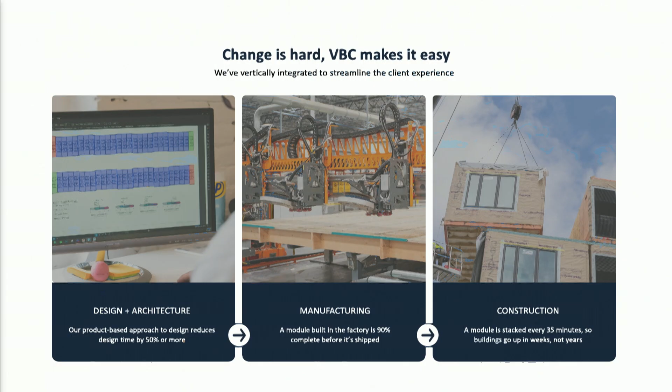I will move on. So what does VBC do? I think it's important to explain all of the things that come under our umbrella so that you can understand exactly why we've made the decisions we've made. So we're fully vertically integrated. We have the design and architecture practice and integrated engineering, which I run. We have 3 different manufacturing facilities, which we'll go to next. And then we have what we call our sandbox construction company. So they manage all of our sets and transportation on all the projects that we do globally, actually. And they do perform general contracting services within our home market of Philadelphia.

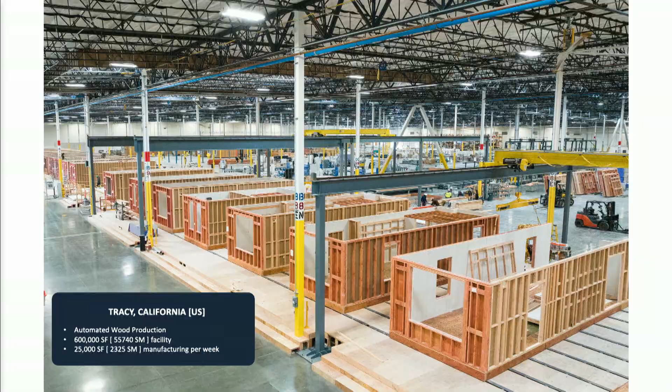This is our California facility. It was formerly a Katerra facility, and we've rebuilt everything inside of it to support our wood building system. It's large. We wouldn't have bought such a big facility, but we inherited it, so we rebuilt it, and it's now running. It's in operation daily. And we are now on to our 5th project going through that facility, which is great.

Highly automated, very different than the next facility I'm going to show you. Only builds wood, currently. TBD on that one, but currently it has only ever produced wood.

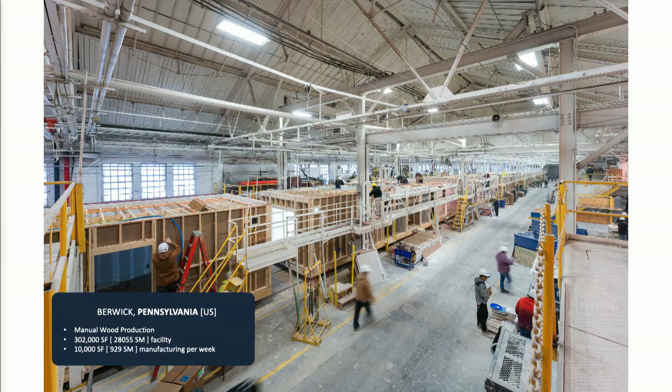And then the 3rd facility, we have a steel facility in Chojnice and Gdynia, Poland, that not only manufactures steel modules, but we also have an automated furniture production facility next door. Why am I showing you all of these? It is really difficult to manage the product strategy on wood and steel at this scale globally.

It is very difficult, and without having really a platform-based strategy, there would be no way that we could be successful at doing this. And so a lot of this came through the thought processes involved in design thinking. How can we find inherent things that are similar in all of the markets that we work with? How can we optimize those, and how can we have really an amazing set of industrial designers, manufacturing engineers, architects who can speak the same language and don't get annoyed by being in the same room with each other?

And then also be able to collaborate with contractors, electricians, plumbers, unions, in an ecosystem that doesn't necessarily always play nice in the sandbox. So that's what we're trying to solve at VBC. We hope that the future of industrialized construction doesn't require a company to kind of gobble up everything in order to be successful. I say it to the design team all the time that I really am creating a whole bunch of product designers. I'm not necessarily trying to create the best architect. I'm trying to create a thought process, really a way of approaching a problem in a way that is manufacturable and buildable.

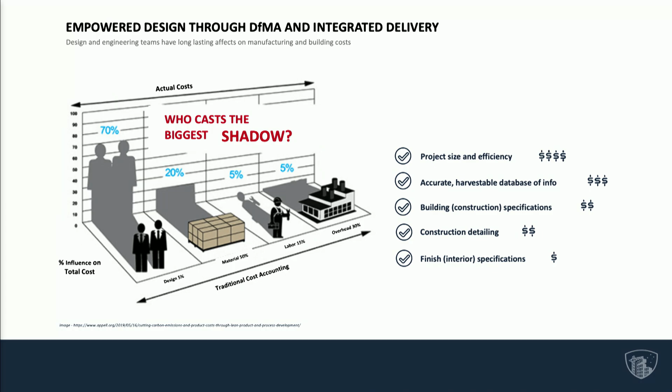So the thought process in developing this design team or this design ethos is really, you can affect not only project size, build less, build more efficiently, affect sustainable construction, you can affect building specifications, you can affect construction detailing, you can affect manufacturing throughput, you can affect all of the things that are maybe less often aligned with the design process.

And then you have to pick which lane you're gonna be in. Do you wanna standardize or do you wanna be flexible? And this is another age-old struggle. And I think that there's business models that work that land on one side or the other side or in the middle. And I think you just have to really understand what markets you're solving for and what your business model really is in order to understand what the solution is for you.

For us, we didn't choose standardization or flexibility. What we did was understand what amount of variability we wanted to allocate for. And part of that reason is because we don't just operate in one region. A lot of the successful volumetric modular companies or panelized companies really do so by kind of owning one region, right? Like know the model that you're building, know where you're going, and optimize the heck out of it. I think that is a way to be successful.

With the kind of natural growth and opportunistic growth that VBC has done, we have had to operate in a lot of different markets that don't necessarily have the same regulation. So we've had to find threads through that in order to be successful. So for us, it was about understanding what the market wanted, specifically the US market, which has a very specific desire to have things not look the same. And me as a still practicing architect, I also have that desire. But I also know that for me, problem solving is the biggest thing.

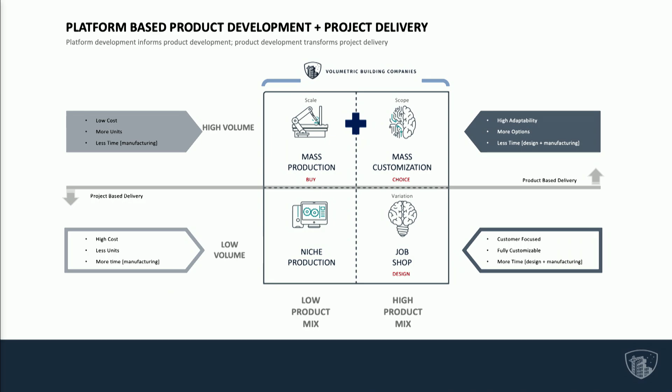Housing is not fashion, right? It's a completely different ecosystem, but what can we learn from the retail industry? I actually really like the idea and thought process of Gap Inc. and how it's evolved. So they have a brand that a client can grow with, right? It's not only aspirational, but they cater to their audience where they're at in their life. And that's a really interesting thing to think about if you're talking about crafting housing that people want.

And they have strong internal processes and things that tie through Old Navy, Gap, Banana Republic, and Athleta, that they can aggregate certain things centrally to gain cost benefit for all brands. And then they also adapt or die, right? They've seen tastes change in the fashion industry, and they allow for change but still maintain brand recognition. So it's one of the things that we studied in development of the platform.

Housing is also not a car. I wish it was. I really wish it was, and in certain markets it is, but it isn't if you're trying to think about things at scale, at least in the US. But what can we learn? Standards are critical. You have to know what you're building with, and you have to have a voracious knowledge of what you're building with. You have to understand exactly how it works at every level. And you need to manage iteration.

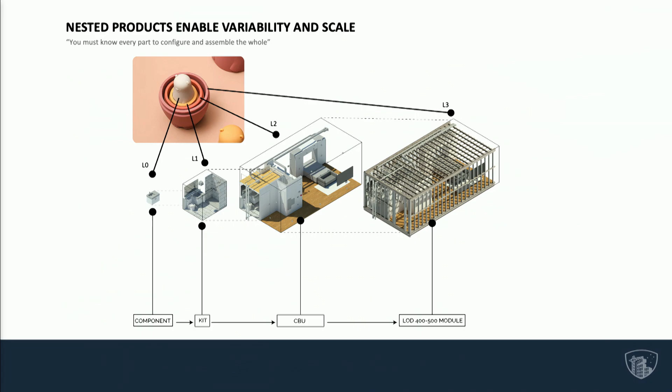Level 3 is something that I'm really super stoked about, and it's really taking that nested philosophy to another level, and saying, okay, what would we do if we essentially take the last 5 feet of a building or the last 5 feet of a volumetric modular box and say that that's free to do whatever you want with, but everything on the inside, we prescribe. That allows us to then fully engineer everything in that module. And that's for us what level 3 is.

So that's something that we're rolling out very soon, which we're really excited about. And that's, I think, where we see some real change and some massive benefits to throughput in the facility. And then this is just practical views of what those levels of product look like, right?

So our base level product is standards. We need to know how we build for both our steel and wood systems. What are the typical connectors? The things that you need from an architect, typical details, right? But typical details that have work instructions that are associated to the factory, videos, things in Spanish and English that really are not just about design, but go all the way through manufacturing.

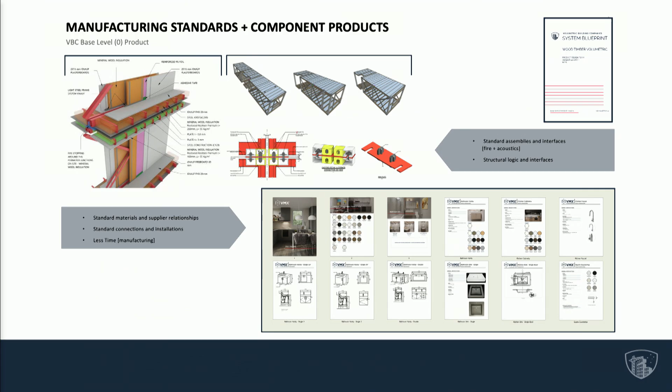We also have standard pieces and products and components that I mentioned, which you see on the screen. And then have a description of that blueprint so that other people understand what the design framework is for that system. And then what does level 1 look like? Level 1 are these kits that I was talking to you about. So pieces and components that can be toggled between and bill of materials that are very specific to those elements that speed manufacturing.

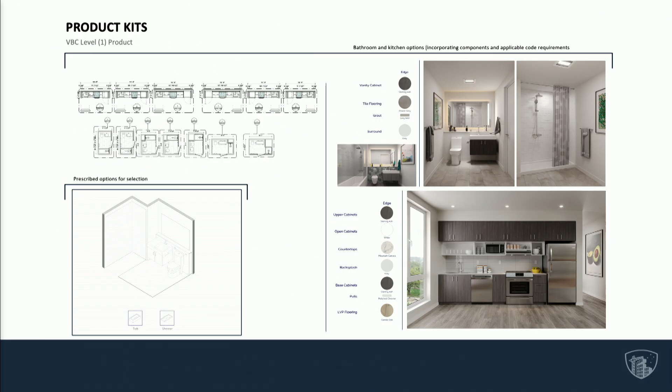Level 2, these CBUs that I was talking to you about. So fully designed, optioned, and rendered. Pieces that can be rapidly deployed in configurators for either us to use internally or external customers to use. We have not rolled out that external function yet.

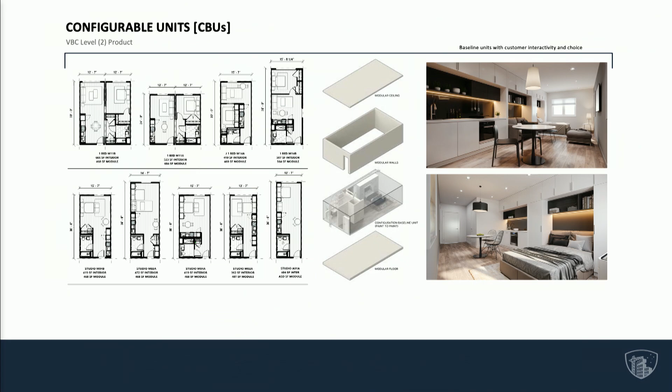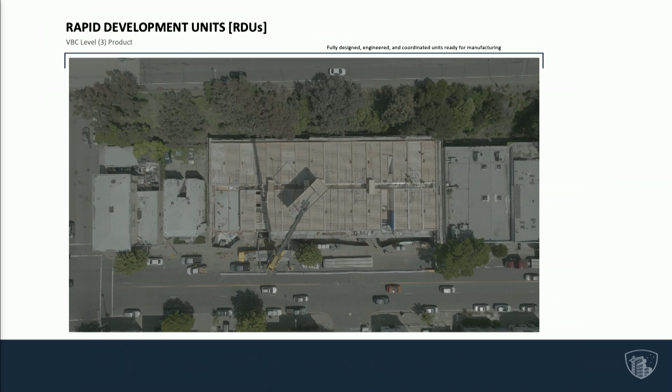And then for me, level 3 is what I'm very excited about. It's really our concept that you can divorce the exterior of the building from the interior of the building, and by engineering that quickly, you can take something that is a configuration or a configurator and really turn that into a building configurator, manufacturing configurator, and know not just that you're producing all of the documentation, but that you're producing all of the BOMs that make it actionable for manufacturing. So that's what we're working on.

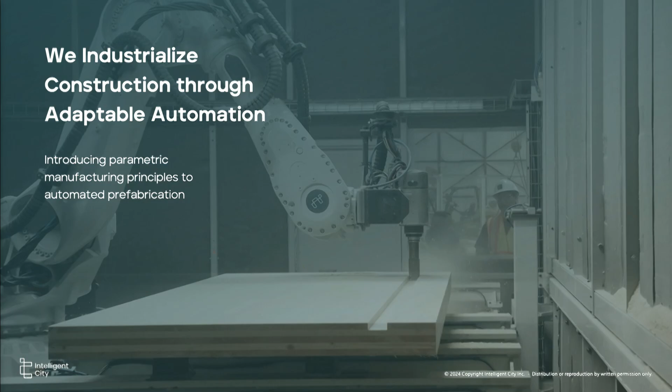We industrialize construction. We try to automate it. We are talking about adaptable automation or parametric manufacturing because we are using equipment and machines and robots that allow us to automatically transfer the data, even if the building components differ from one to the other. The sequence of workflows is the same. The code generated is automatic. And ultimately, we want to develop basically a building configurator that allows us to automate or at least augment a lot of the planning and delivery processes of these kinds of buildings. I think I'm the first one to talk about the problems that we have in the industry, but I think we all know about this.

We all know about rising construction costs. We know about ESG requirements. We know the problem with construction is that it's one-off in three dimensions: different teams, different time scales, different locations. There are so many challenges to really innovate in our industry consistently, and yet we do have everything that's needed. Especially when it comes to wood construction, we have the forests, both in Canada, where we are from, but also in the US, of course, to really get there.

So for us, the solution was a product platform, specifically with mass timber, to go into the urban housing market. We have developed a product approach to what these buildings can look like, how we can use a kit of parts that is adaptable and configurable enough to design many different types of mid-rise to high-rise buildings. We're using offsite manufacturing innovation to automate the manufacturing of these components. And then, of course, we also really need to look at the on-site assembly processes and how these building components come together. Another diagram, maybe we can add that to the ones we saw just now. I think it's very complementary.

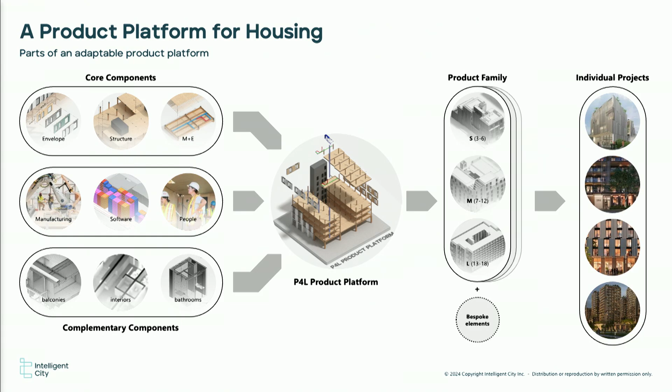So when we look at the product family and ultimately the individual projects, they can differ significantly, especially in the multifamily housing market, where the shape of the building is very dependent on the lot, the regulation, the city you are in, and accommodating all of these variations is, we believe, the key to success. Can you accommodate setbacks, balconies, overhangs, or any other type of building? When you go between low-rise and high-rise, things change, right? Building codes change in different jurisdictions. These are the situations we need to accommodate to serve a large enough market segment that makes sense for us to invest in these technologies.

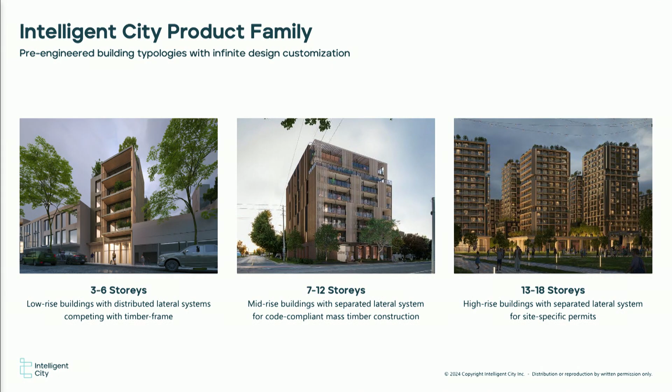When we talk about product, we usually talk about three different sections. We talk about low-rise, three to six stories, where we are competing against stick frame. We're talking about the mid-rise market, where mass timber construction is really very promising. It is cost competitive or even cheaper than concrete if you do it right. It is especially faster as well. And then you can go up to 18 stories now in many states and provinces to go real high-rise and build larger developments.

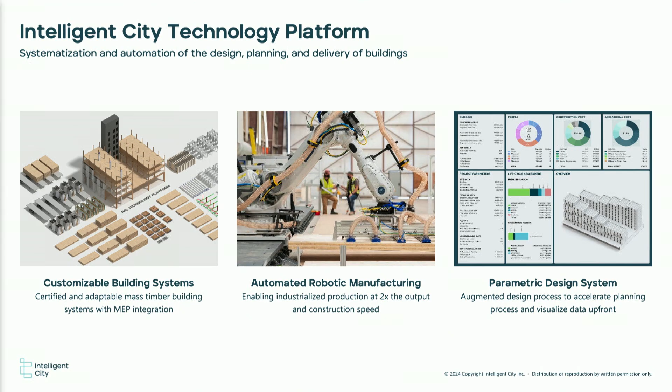How do you prefab or manufacture with mass timber is different than with stick frame. So we took that opportunity to innovate a little bit ourselves in this regard. And then on the design side, now that we understand our systems, we understand what is possible, we can also develop software or tools and plugins that help us design buildings within that realm of what is possible, within that design space. And so ultimately, another thing that changes is you go from designing projects to configuring products, right?

And I think this is a really important change, and it really touches on that sort of major challenge that we have in our industry, where you have the architect wanting to customize, and you have the developers who expect a certain customization for their own branding, whereas what we as manufacturers want to do is standardize, right? And so that sort of balance between how can I enable customization within my kit of parts to allow for that, while still keeping the manufacturing processes standardized or similar enough so that they don't upset my manufacturing process, right?

So this can happen through software automation, through manufacturing automation. It can happen through a set of standards, right? Can your windows be all different sizes, or can they only be 6 different sizes? There are decisions we take every day when we develop our kit of parts that are really, really minuscule, but have really important consequences on design freedom. And I think that's really the key to making this industry successful, is to finding that balance.

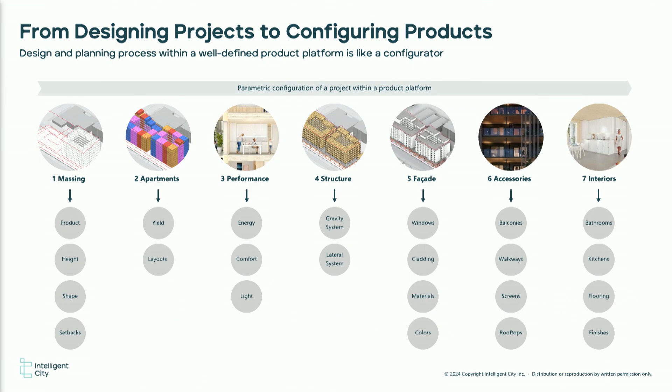I think the VBC is doing a really good job at that, because this client-oriented, what do you need to feel comfortable with the design of building? What kind of variability do you want? And still having that as part of your components, where you can just still go manufacture every day without changing too much. So the last few years, we developed and tested and certified these building systems, again, for mass timber,

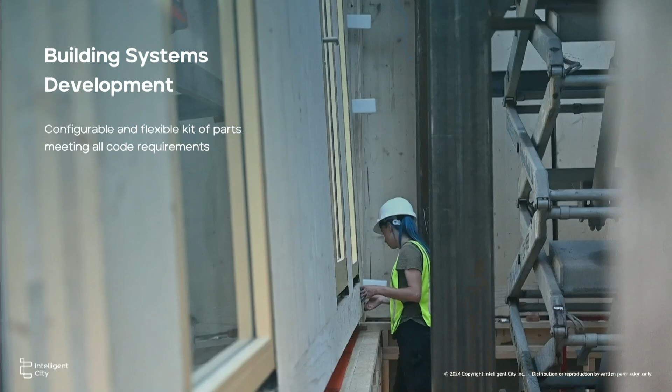geared towards high-rise urban housing. We like to say starting at 4 stories, and then mostly going into the high-rise segments. 10 to 12 stories is really where the performance of mass timber buildings shines. So to dive in there real quick, because it has an impact on design and variability, we make floor panels or floor cassettes. These are actually double-layered floor cassettes. They have a hollow core, and there are services inside. So we're trying to flat pack and still prefab as much as possible, electrical and mechanical systems.

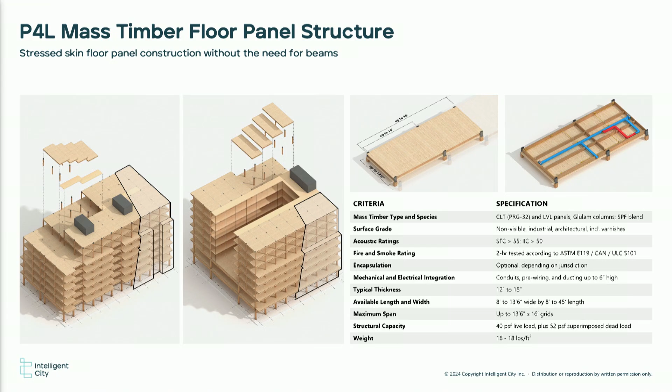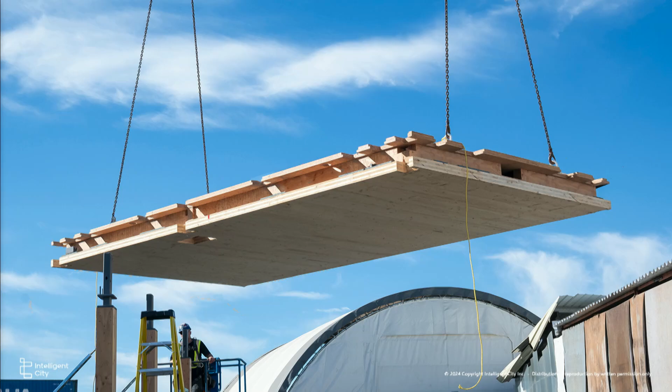And these floor cassettes, because of the way they are made and put together, they can actually go wider than your usual piece of CLT, and they can have multiple spans to accommodate different structural grids and layouts. Again, this is one of the floor cassettes you can see here. You can see how it's double layered. It's actually glued together. And then we have our envelope system that is, again, high rise. So it's a curtain wall system. It hangs from the structure. And it accommodates essentially all kinds of geometric situations. You go on corners, interior corners, exterior corners, balconies, parapets, and so on.

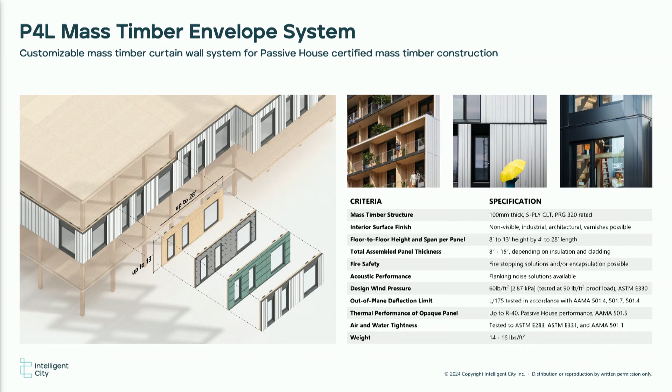And the variability here is a geometric variability and a spec variability as well, right? You can have different types of windows, different types of claddings. This is really where we're pushing really hard right now to figure out what kind of variability is needed, what kind of energy performance is needed. What you're seeing here is 8 inches of insulation on top of 4 inches of CLT. So this is a really thick Passive House certified panel. This is how we tested them. So they are Passive House certified or can be Passive House certified, high energy performance.

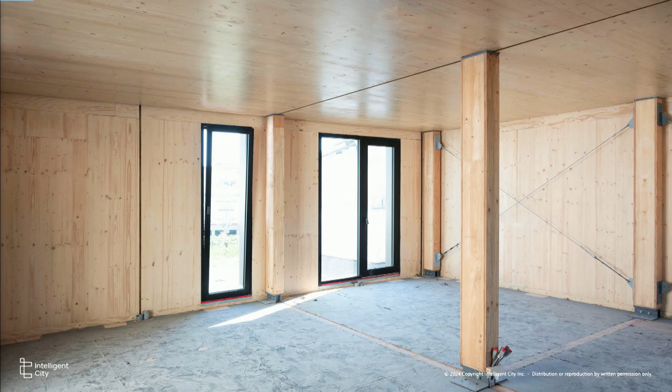And ultimately, this is what you get from us directly, is the core and the shell, the structure and the envelope. It has a clean ceiling. You can see that here. The way we designed our floor cassettes is that the fire stopping layer is the bottom layer. So you have a clean sheet of CLT basically on the bottom, and most of the services come up from the floor upwards so that we can keep that fire stopping layer relatively simple.

And again, maybe a parallel to the previous presentation here, the cornerstone to enabling this flexibility and to integrating design into manufacturing is really, I think, the apartment layout, because that's where everything comes together. That's where your services get identified where they go. But it's also really in relation to the structure of the building. And because we make the floor cassettes, for us it's really important to tell the client and to work with the architects to say, look, this is the structural grid of your building.

This is how the apartments need to fit in there for that to make sense. And this is sort of also maybe the point where you have the most conversations and you need the most collaboration, because here is where the ideas of the developer, the marketing department from the developer, they clash with what's

possible, because oftentimes developers are used to basically infinite variability, right? And they look at square feet of apartments rather than overall efficiency. So you have sort of the local versus global optimization problem. You look at a single apartment layout, you want to make it 10 square feet bigger, but in return, overall the building gets more complicated and more costly, right?

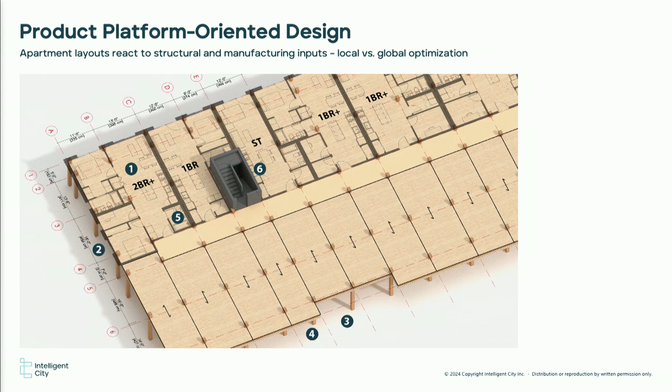So that's a big impact on sort of, I would say there's manufacturing-aware design, and there's also sort of product platform-aware design, right? And when it comes to manufacturing, we implemented a few robot cells or automation centers where we think it adds a lot of value. It enables us to produce faster and more consistently. But what's also really important about DFMA is that if you employ automation, it affects your processes as well.

The car industry is a great example. No one could assemble a car by hand anymore nowadays the way cars are made. The process, the parts, and the manufacturing equipment all develop together, right? And in construction, a lot of the processes and the materials are or have been developed to accommodate 2 hands or a tower crane. And that sort of in between, where some of the industrial equipment comes in, hasn't really been explored.

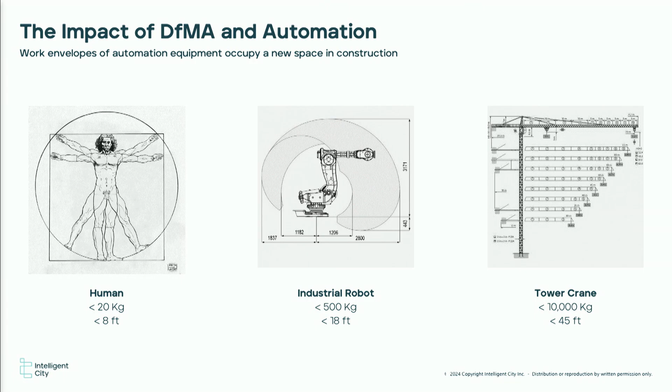So for us, a lot of impact that robots, for example, have on production is that they can lift larger pieces, but not super large pieces. And they don't have as much dexterity as human hands have. So screwing big wood screws is really challenging for robots, but it's very easy for humans. So there is a negotiation of what the process really looks like and how the process changes when we use automation.

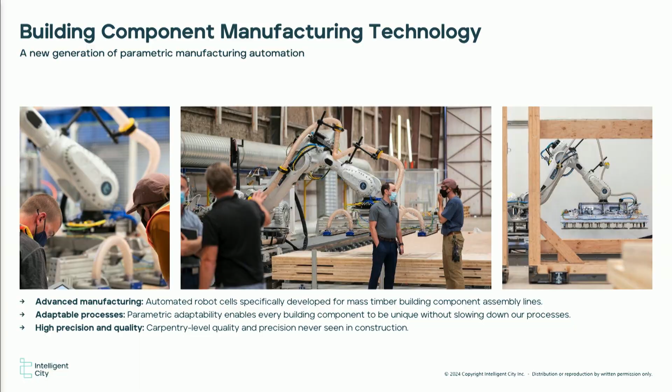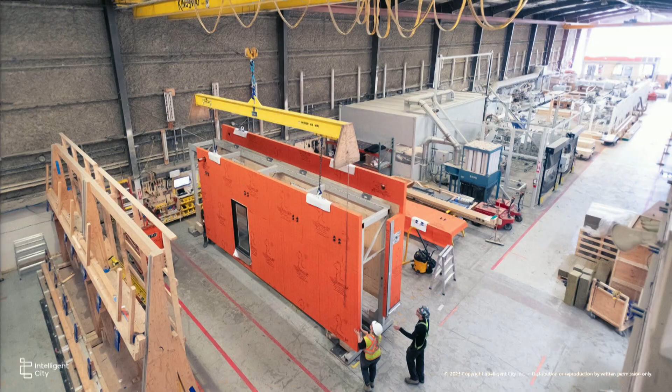Ultimately, we have our own CNC processing. We have an assembly cell for envelope panels, even an assembly cell for our floor cassettes. The range of automation is anywhere between 20 and 80% for these different products, and there's still a lot that we want to improve in the future. This is our first facility, so where are we in the journey?

We ramped up our facility just last year and produced our first project. And it's just a 15,000 square foot facility. It's actually really small. It can make up to 200, 250 homes a year, or at least the components for those homes. And we keep ramping up, and we're looking at expanding as well.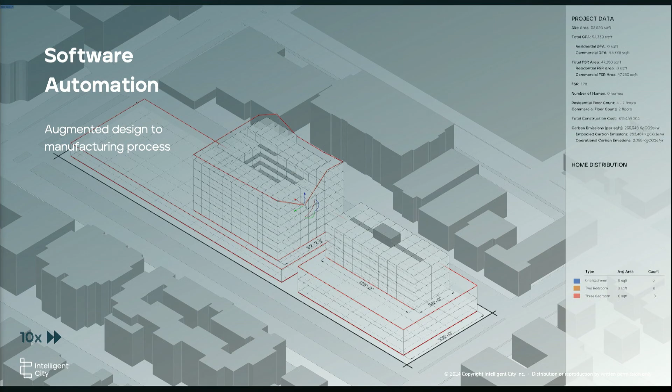So just another small comment about software. If we know how this all works, we can automate it. That's, for us, really important. Architecture is not scalable. The architectural planning process is not scalable. So we really want to find a common ground, a common data environment, and then slowly augment the design processes, automate how apartments get put into these buildings, how the structure gets automatically generated, and analyze the data as well.

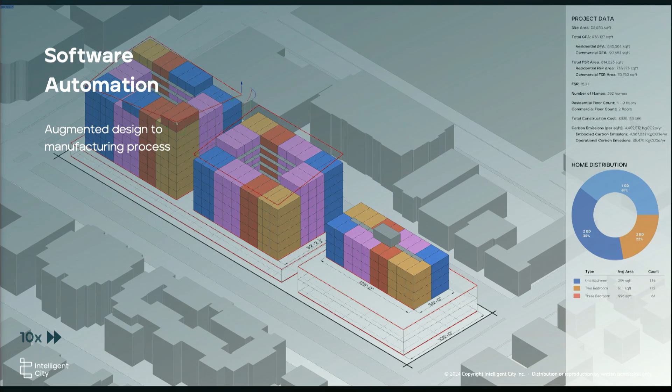So it's become almost a side project at this point because we're really focused on manufacturing, but it's still something that we're working on in terms of the common data environment, so have a sort of a seamless flow from design to manufacturing. And one other point here, again, is sort of looking at what's the impact of that on design.

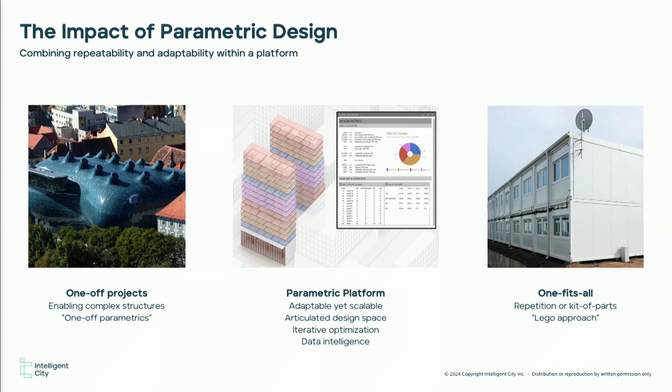Well, parametric design has oftentimes, for the last 20, 30 years, mostly been used to create really complex one-off projects. Some of these projects are only possible because of parametric design, because you could program the design process. And then, on the very other side, you have sort of a one-fits-all kit of parts repetition approach. And that's where parametrics can assist us in allowing enough flexibility, especially in housing and commercial buildings, to adjust the geometry on the fly, to adjust it gradually without having an impact on the manufacturing complexity.

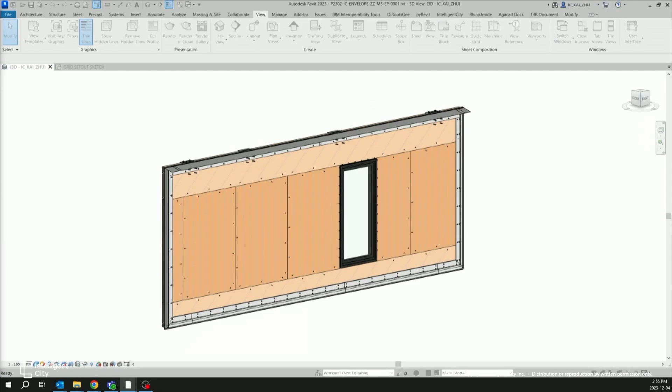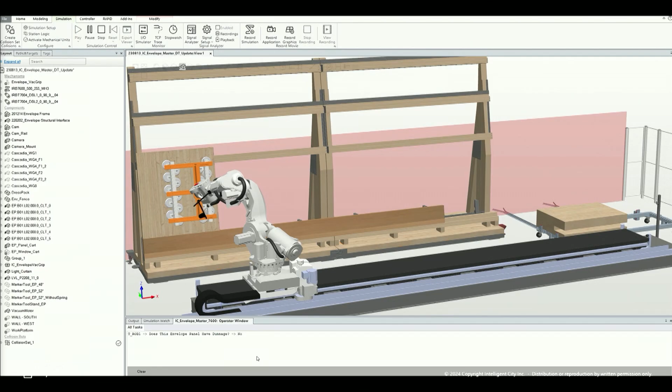So as one example, going through the motions of automating how different components and different parts are generated, the drawings being generated, and ultimately the manufacturing data being generated. For us, actually, we started in the back end of that. For us, the most important aspect of all of this was to allow our machines to function really quickly. So loading the geometry into a plugin that would generate the robot code to then assemble our building components or machine our building parts. That's where we really focused in the last few years.

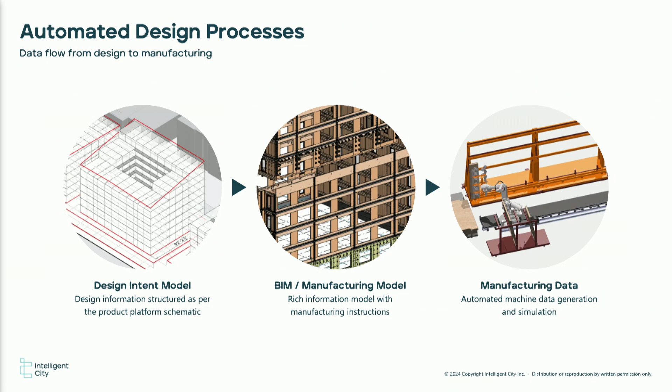And then we're going backwards towards automatically generating the parts and then ultimately automatically generating the whole design of the building. So maybe the most important slide, in my opinion, is having a data flow that allows you to design a building with some geometry. That geometry is being used to then generate the building parts, and that geometry is being used to generate the manufacturing information.

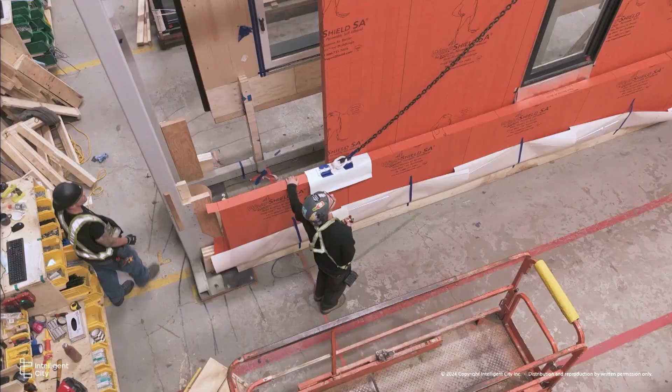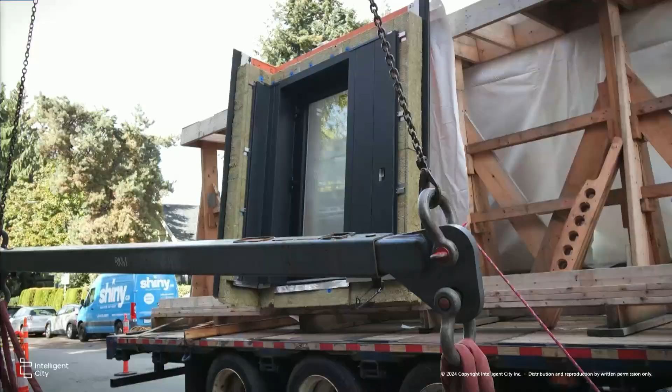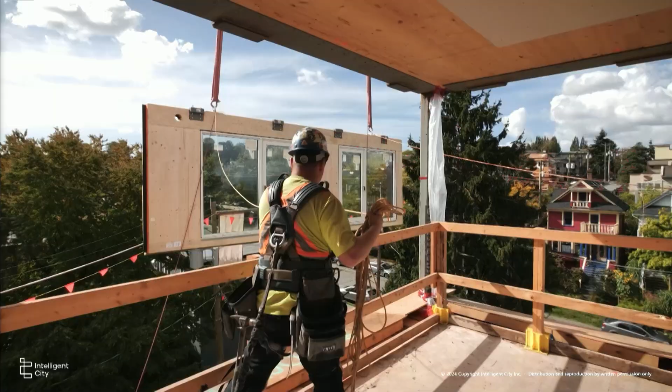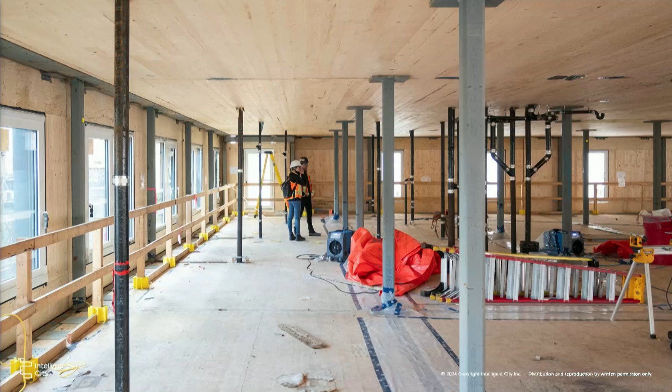The first time you develop a system, you develop a component, is when it's going to be the most complex and the most expensive, right? Because only at that point, when you are here on site and everything has been installed and all the little problems that cropped up have been figured out, you actually understand how complex it all is, and now you can optimize, right? So our product will never be more complex, it will never be more expensive than it was at that point,

and it's really exciting once you've climbed that hill to see where the next hill is, where you need to go from there. Reaching that point is extremely hard, and I think everyone who is here today went through a very difficult journey to get there, so I really respect that as well. We have a really great team that helped us accomplish this. The next project is just starting up production. It's going to be in Toronto, another 9-story building. We're doing both the structure and the envelope, so hopefully I'll have some more videos and pictures in the future.

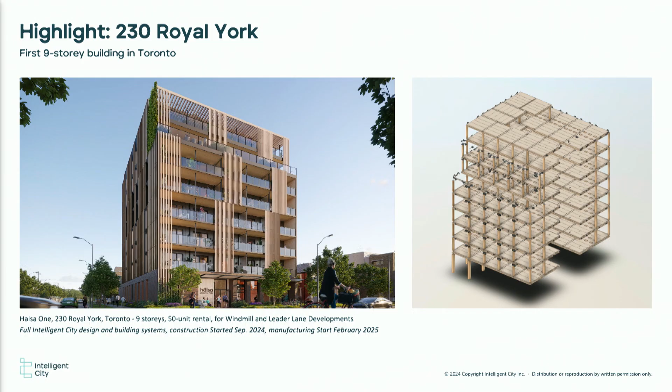And finally, we move to our last set of speakers, because it's actually 3 speakers. We've seen 2 examples of vertically integrated companies with a strong focus on the connection with DFMA. What I think is really interesting here is that we're going to hear from a collaboration called Folia, which is really about creating a shared understanding and co-development from different companies working together in a collaboration.

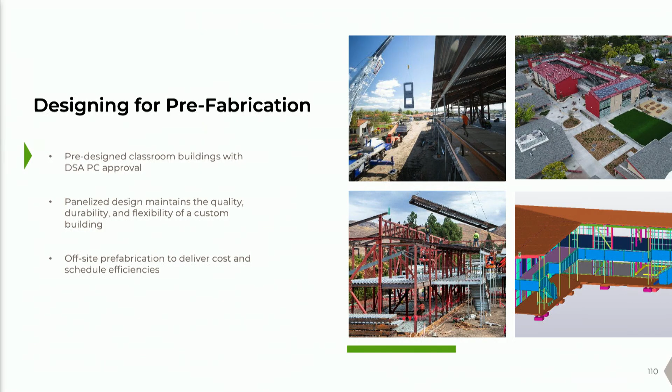But honestly, what really makes it happen is that we've spent a lot of time thinking about every single thing the guy in the field has to do. If you look at our footing system, it's a basic ladder-style footing system. All the footings are the same width. They're all the same depth, right? The only thing that changes when you come to brace frames is that there's more rebar in there.

Well, what does that mean? It means that the guy in the field that lays it out does nothing but corner points, and he stretches a string across there and he paints it. The guy that comes along in the tractor to dig it, he's got a bucket the same width as our footings, and he just goes in a straight line. It's not like digging great big spread footings underneath brace frames where the guy's got to turn around with the tractor every which way to dig corners.

To me, that's the win in what we're doing differently with the team, right? Is thinking about the guy every step of the way, the guy in the field that has to build it. And I think what the magic, and you're going to hear us repeat it over and over, was a level of trust. That as structural engineers, we knew that what we brought to the table was the understanding of how to achieve what Gino's talking about.

Respecting the guy in the field who's actually doing the work, who we're trying to optimize their labor, their workflow, their process, and being able to look at design through the lens of not just did we check the box of the code, and by the way, DSA, maybe the most restrictive, difficult review code agency that exists on the planet, it feels like. And so being able to do it in that environment and have it really be about the process, this applies to K-12 schools, but there's nothing that we're talking about today that doesn't apply to any other type of building.

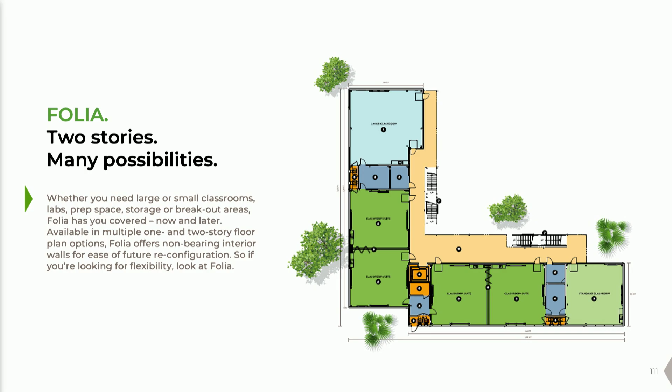We knew we wouldn't follow the slides on this at all, so excuse us. So Folia is actually a two-story classroom building. It's an L shape like you see on the screen here. As we said, we built 28 of these. None of them have actually looked exactly like this. We have a pre-approval from DSA, which we're in the process of renewing for a third time, almost there. And that is a whole process in and of itself that we could tell you about some other time.

But we knew we needed to balance the prefabrication and pre-engineering with being able to customize it. So mostly we do that by doing most of the customization on the interior and keeping the structural frame and the exterior as similar as possible, although we've definitely customized that quite a few times too. And we work through that with our clients to understand the pros and cons, the benefits and the trade-offs, to get the project that they want that delivers the best value for them.

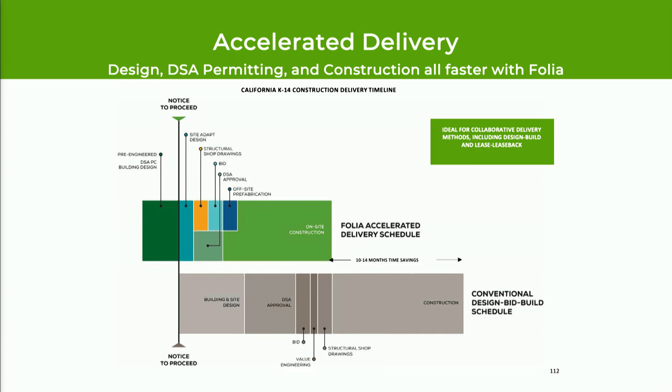If I can remember how to use the remote, there we go. Really, one of the things we've learned is that most of the value we're delivering comes from compressing the schedule. This shows that we're able to squeeze almost a year out of a design and construction schedule through having some of it pre-engineered and prefabricated, through overlapping construction phases, through shortening construction durations, and through a lot of design streamlining with the client and using our pre-approval. Compressing that time is valuable in and of itself to many of our clients, but it also delivers a lot of the cost savings by accelerating that process.

So, we already said there's been 28 of them, as Aaron alluded to. None of them are the same. All but a few, like total customs, are the same footprint, though, more or less. So it's designed around a completely open floor plan. There's no load-bearing walls or anything in the structure. So from an interior standpoint, we can pretty much do whatever the client wants.

So they're all the same footprint, but they've all been changed to some degree to fit the programming that the districts need. Of course, like the other two presenters have said, there's a constant cycle of feeding information back into it, right? Being out in the field, talking with the guys that are building it, and figuring out where things aren't working, and then bringing them back in.

Like this update we're doing now is pretty significant, changing the roof profile. We've also got a single story on the way that we're applying this to, but also relative to this success, we do this stuff on other buildings all the time too, working together as a team. I mean, we've got a process and it works. And once you get this figured out, you can quickly get a lot of benefit in one-off projects, right?